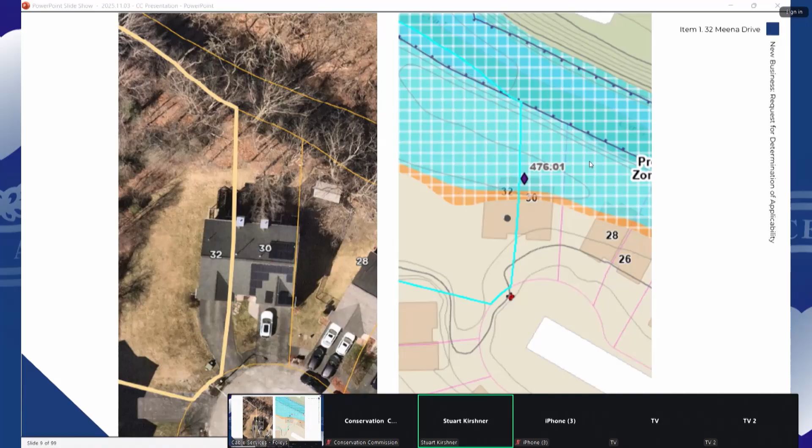Motion for a negative determination. Second. Commissioner Canton? Aye. Commissioner Kirshner? Aye. Commissioner Nystrom? Aye. Commissioner Frattoni? Aye. You're all set. All right, thank you. Have a wonderful evening. You too.

Next item, old business, 342 Lake Avenue, notice of intent.

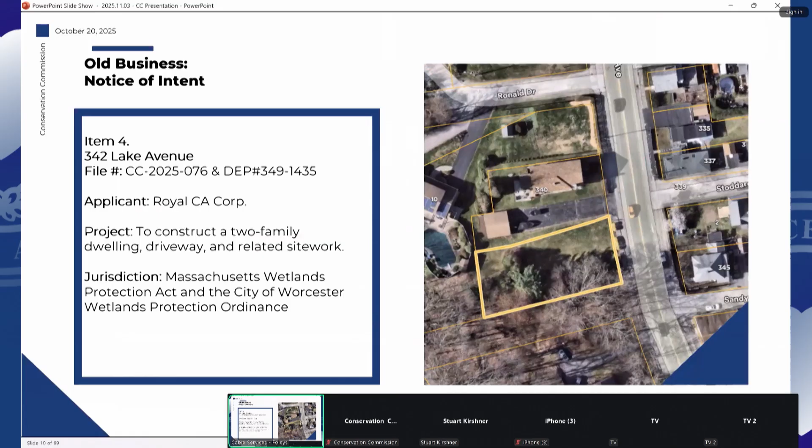If you recall, I was here last time for the construction of a two-family dwelling in the buffer zone to BVW and bank associated with an intermittent stream. At the last hearing, we presented our plan, knowing we had a few minor modifications that have since been provided to the Commission. Namely, we showed the walkways as they will extend from the driveway. We added the trees along Lake Avenue, and I believe that was it. But the revised plan is up there on the screen, and I believe the Commission has copies, and happy to answer any questions the Commission may have.

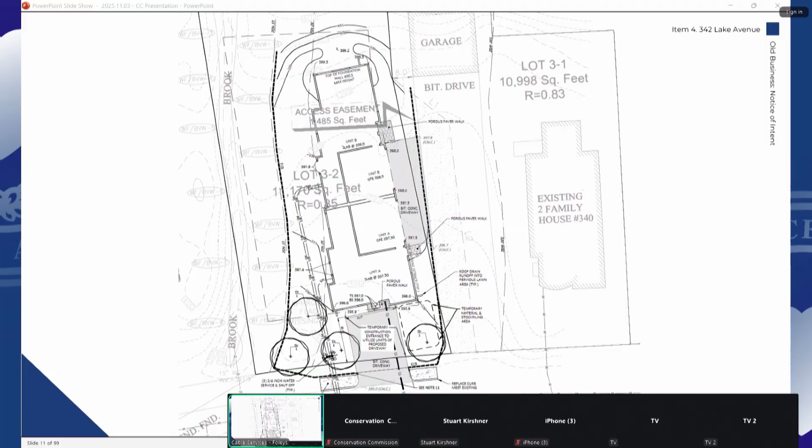Thank you. Any additional comments or questions from staff? Nothing further from staff. The revised plans address all our comments. Commissioners?

Anyone here from the public on the project? Anyone online? No? Okay. Is there a motion?

Motion to close the public hearing? Second. Okay. Commissioner Canton? Abstained. Commissioner Kirshner? Aye. Commissioner Nystrom? Aye. Commissioner Frattoni? Aye. Thank you. Commissioner Canton can't vote on this one, sorry.

Fair enough. Thanks very much, everyone. Have a good night. No, you want the order of conditions? We need to vote on that. Oh, too, sure. Please do. Thank you.

So in addition to the standard conditions, we have condition 24 for wetland flagging. I guess a question to the Commission: typically the Commission wants to see permanent markers installed associated with buffer zone construction like this. Is that something they'd want to see here?

I guess how close is it, just trying to see exactly how much space there really is between any of that land that's not vegetated. You can see on the screen here, we have some pictures. Top left is looking from Lake Ave towards the property. This bottom one is looking up the stream channel that's just in the woods here, and this is looking towards the street. The 15-foot buffer probably extends into that existing lawn space. Typically we do the 15, or alternatively could do along the existing vegetation line if we don't want to take away additional lawn area, but it's up to the Commission.

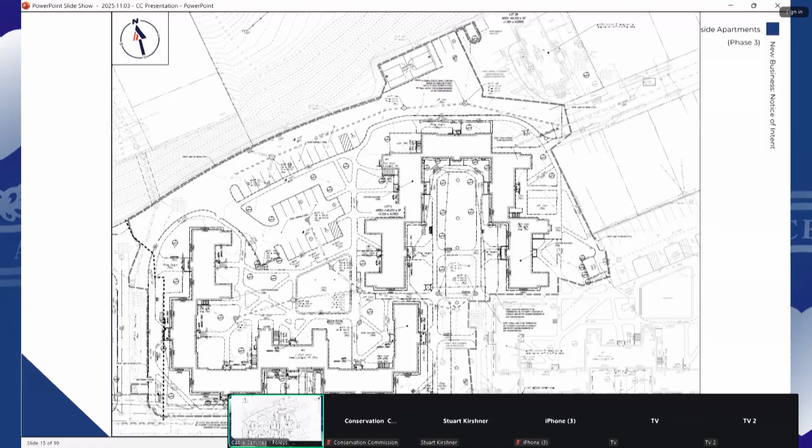Good afternoon, or good evening. Matthew Ashley with Bohler, here on behalf of Tremont Development Partners and E3 Development LLC. So we're here for you tonight for Phase 3 of the 4-phased redevelopment of the Lakeside Avenue Affordable, or Worcester Housing Authority complex over there.

So you're probably familiar with the first 2 phases. We've been in front of you a couple times now, so this is just the 3rd phase, which is not as far down Lakeside Avenue. This particular phase is to raze and rebuild 2 of the buildings out there and replace them with a single building complex with 104 units.

Jurisdictionally, our proximity to a catch basin right on Lakeside Avenue is for our local filing, and then Coe's Pond is right across Lakeside Avenue, and the 100-foot buffer just comes onto the sidewalk area that we're replacing as part of the development, along with some utility connections within Lakeside Avenue. But other than that, the rest of the site is outside of that 100-foot state jurisdictional buffer.

So on site today, there really isn't much in terms of stormwater treatment. Just some catch basins out there that get piped into the larger stormwater system within the city of Worcester.

Under the new conditions will be fully state and local compliant deep sump hooded catch basins, water quality units, and an infiltration system for the first 1 inch of rainfall across the development. Other than that, we're reducing impervious surfaces out there, and really a big improvement to the area in terms of stormwater treatment and quality. Eric and his team provided some initial comments to us prior to the last hearing, and we responded to all those comments, didn't really have any objections.

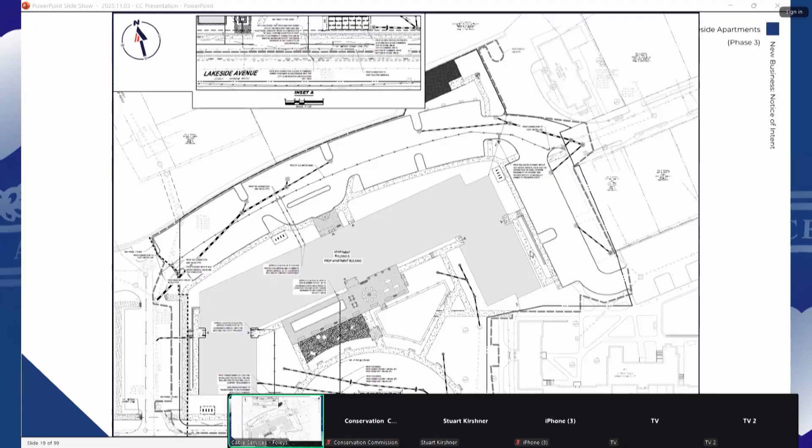Okay, thank you. Staff, any additional comments? I don't have too much to add on this one. As Matt mentioned, we sent over comments from our team. DPW also issued a comment letter. We received responses from the applicant going through and addressing each of those. We got a revised plan set. Definitely happy to see the inclusion of the infiltration unit on the most recent set of plans. So at this point, I think we're all set.

Thank you. Commissioners, questions or comments about the project? Anyone here from the public on this project? Online? It's gonna be a quick night. Is there a motion?

Motion to close? Second. Commissioner Canton? Aye. Commissioner Kirshner? Aye. Commissioner Nystrom? Aye. Commissioner Frattoni? Aye. Proposed order of conditions?

All right, so in addition to the standard conditions, we have 24 for wetland flagging, 31 for SWPPP, 33 for stormwater management system maintenance, 38 for infiltration unit inspection, 39 for certification of stormwater infrastructure, 48 for dust control, 49 for dewatering, 50 cement truck washing, 51 equipment placement, 55 for construction monitoring reports, so just the SWPPP reporting, 56 for spill prevention, as-built plan for a COC request, 66 for sand and salt, 68 for wetland permitting with ongoing conditions, 37, 66, and 68.

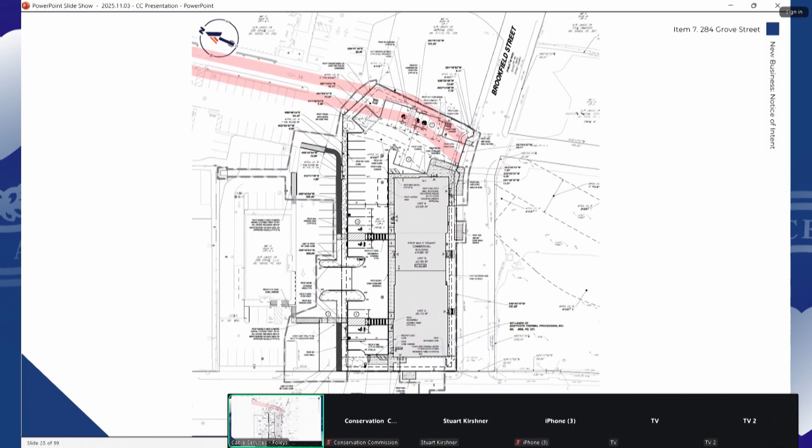This plan, so the reason we're here is we're proposing a stormwater connection from our proposed stormwater system to one of the Millbrook box culverts that runs underneath the site. I've highlighted those in red on this plan and the plans that we'll see on following slides as well.

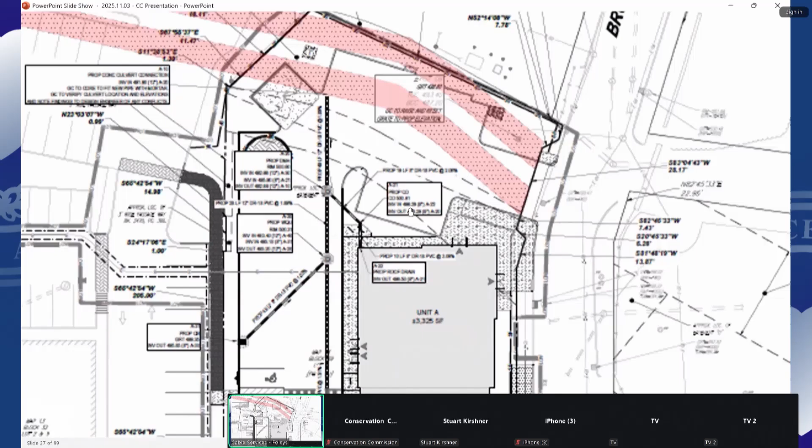So this is our grading plan. It actually might be helpful, Eric, if you just go to the next one. So this is our stormwater plan. As I mentioned, we are proposing a new connection, a core into that existing culvert. It's going to be a 12-inch DR18 PVC pipe. Prior to discharge of the stormwater into that culvert, we are providing a series of catch basins that will provide treatment via the deep sumps within the catch basins, and then just prior to discharge, it's actually going through a proprietary water quality unit to provide additional water quality control, and then it will discharge into that culvert. The roof runoff, as you can see there, is also discharging into that culvert.

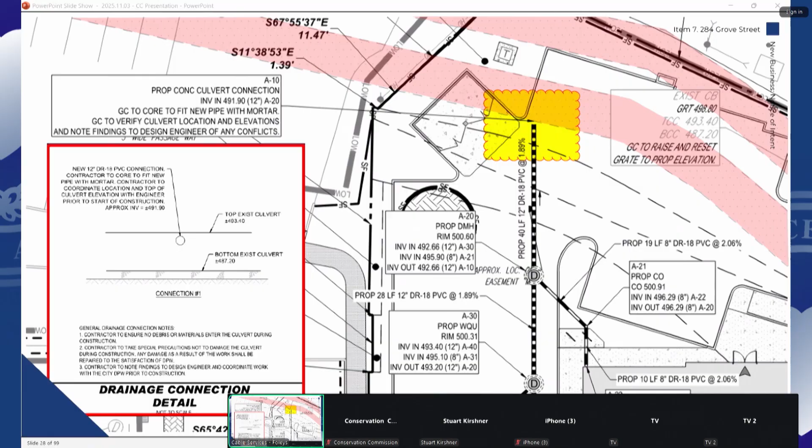We're really familiar with this culvert, given that we did the bank development next door as well as that medical office building. So we're familiar with the structural integrity and how to work around it. We've also made similar tie-ins to the culvert elsewhere in the city, and on the last slide you saw that construction detail, which we've kind of crafted for similar projects in the city in the past.

As I mentioned, with the deep sump-hooded catch basins and the proprietary unit, we're providing 95% TSS removal prior to discharge into that culvert. As far as protection of the culvert, our site contractor submitted a culvert protection plan that lists practices they'll implement during construction to protect those culverts.

I'll just list those off right now. It's going to be locating the culverts with stakes, so they'll have the culverts delineated on site so that it's clear where they are located. They'll do daily surveys and inspections of those stakes to make sure they're still there. If they're not, they'll be replaced.

No stockpiling of materials on top of or within 10 feet of those culverts. No parking construction equipment on top of or within 10 feet of the culverts. Any excavation within 10 feet of the culverts will be done with the aid of a groundman specifically tasked with directing the equipment to minimize ground disturbance near the culverts. And when equipment is required to operate on top of the culverts, they'll use low ground pressure equipment models, which reduce the load placed on those culverts.

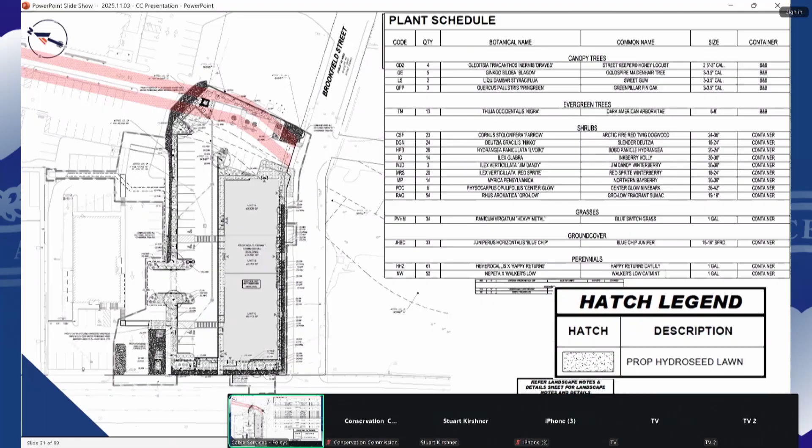And that's really all I have. I know we have received comments from conservation staff as well as DPW. I think we've addressed most, if not all of them, but happy to answer any questions the commission may have. Thank you.

Staff comments? Yeah, so as Nick mentioned, we did submit comment letters both from the Planning Division and from DPW, and got responses to those. I think our main concern with the initial filing was just getting more details about the protection of the culvert during construction, so it was good to get the protection plan that was provided.

So the one lingering concern that I have, and I mentioned this earlier, is that the construction entrance is currently proposed on top of the culvert, and it seems to conflict a little bit with some of the measures described in the protection plan. The other concern with the location of the construction entrance is that there's a catch basin right in front of it, and I know it's going to be protected with a silt sack, but I think there's definitely cause for concern with sedimentation that might get tracked out into the street from vehicles leaving.

So I don't know if there's a possible way to relocate that to the Grove Street side. I know the building makes access difficult given its location, but that's something we would probably want to see considered. And if it's not feasible to move that, I think we'd want a little more detail about how that location is not going to negatively impact the integrity of the culvert itself.

But yeah, most of our comments, aside from the culvert protection, were minor plan changes that have since been addressed. Don't really have too much more on that at this point. So I'll turn it over to the commission for any further discussion.

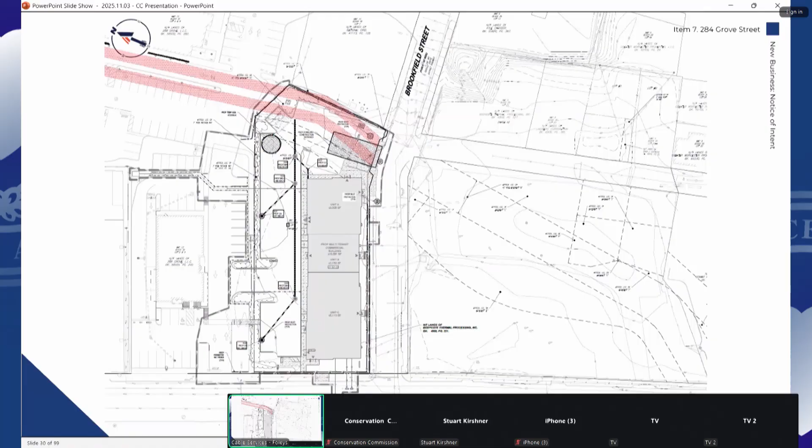So I have a similar concern about the construction entrance being over the culvert. My other concern is that when this property was in its demolition phase, there was very little regard to the care and cleaning of those storm drains, and it was one of the reasons I even joined conservation. Frankly, I walked by the site and was alarmed knowing that the brook ran right underfoot and nothing was being done. It was the construction entrance for the demolition phase as well. So it's hard to imagine the equipment going in and out over that drain and on top of that culvert without it causing problems again.

So if there's any way to move it, that would not just be a preference, I would say that'd be a requirement. Because if it's a construction company related to the ones that did the demolition, I think somebody ought to be there every day to make sure that this is actually happening.

Yeah, I don't know, I wasn't involved in the demolition process. My guess is Ricciardi Brothers, they're the ones that prepared the culvert protection plan, that are the site contractors for this job. My guess is that it was a specific demolition contractor that did that work, but I'll relay that message to our client and make sure that's clear.

From my perspective, the site hasn't been particularly well protected or managed even since then. The fence falls down, the erosion barriers vanished. So yeah, I'm not feeling really comfortable that no matter what plan you put in front of us, somebody's going to execute on it. And since I live in the neighborhood, I will be watching.

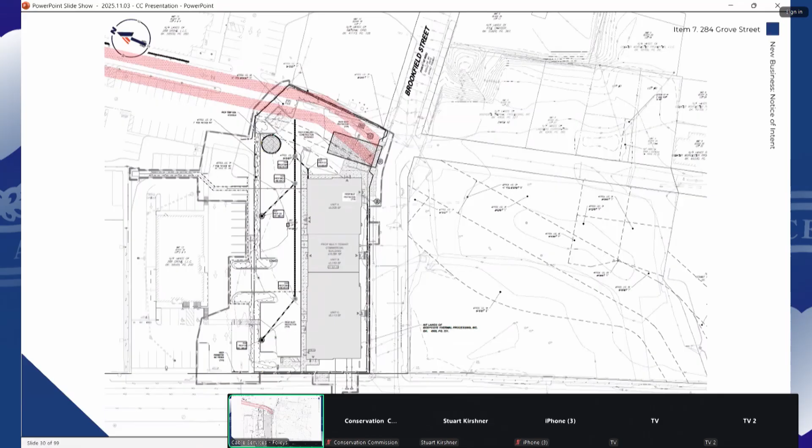Good evening. My name is Tim Hool, civil engineer and engineer of record for BL Companies. For the record, our office address is 100 Constitution Plaza in Hartford. I'm here tonight on behalf of National Grid, Massachusetts Electric Company, as the applicant and current occupant of the site. As mentioned, the address is 449 Southwest Cutoff.

I will say, with that, we are in for permits with both municipalities, as you know, as we are here tonight. We did appear before Millbury a few weeks ago. We were continued because at the time we didn't have the DEP file number. We have since received it, and I think the meeting for Millbury is on Wednesday night this week. They had no comments of consequence for the wetlands for this project, but I just wanted to share that in full disclosure.

So the total property is about 12.8 acres. As I mentioned, it's currently occupied by National Grid. It is an electric operations facility, so it's their electric division. They do use the existing building that's in the neighborhood of about 60,000 square feet, give or take, as an office facility, as well as there's a bit of warehouse and training space within.

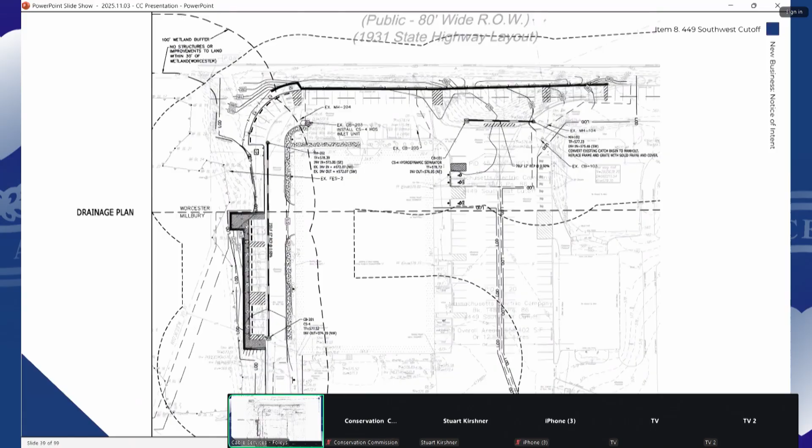And then a lot of the remainder of the site, especially as we look towards the east, which is off screen, they use it as a training grounds for the various crews. So it could be training for their lines crew, their pole crew, or various other teams. So this is a pretty high important site for them.

The site is bordered by Gen Manufacturing to the south, Discover Services to the west, a wooded area as well as Hourglass to the east, and Route 20, or Southwest Cutoff, to the north.

The west side of the site is where the main jurisdictional areas come into play from a wetland standpoint. There is a sizable wetland that totals a little under an acre. It's immediately west of the property.

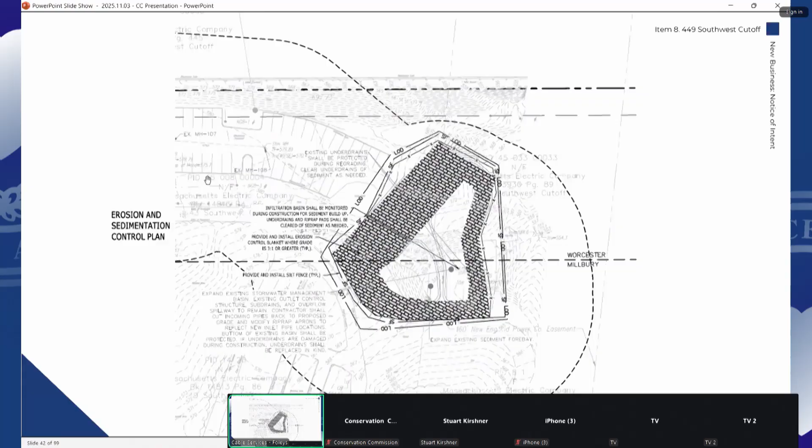It's that area just to the very edge of our screen here. There's only a small portion of that, about 12,000 square feet, that falls physically on this property. The remainder, roughly 40,000 square feet or so, falls on the abutting property to the west. However, it is certainly a wetland.

There is also a little bit of wetland resource area immediately south of the driveway, which comes in off of Lottie Farm Road in Millbury, down in the west corner. That wetland on property is noticeably smaller, about 2,500 square feet or so, again within this property.

From a larger picture standpoint, we also have the stormwater management system on site. It is largely self-contained. Currently, the stormwater goes in one of two directions. The westernmost portion of the site is captured in catch basins and flows directly out to that western abutting wetland, the larger one, with no major formal treatment. There are catch basins there, but there's no sediment forebays, no hydrodynamic separators or similar treatment.

From the majority of the site, especially east of the building, the main training areas, parking lot, and so on, that's all captured similarly in catch basins with very limited treatment. Then it's piped underground into an existing stormwater management basin on the very eastern limits of the property. That basin does have a little bit of treatment—there is a sediment forebay in there, and it does have an under drain. So there is a treatment happening within that basin.

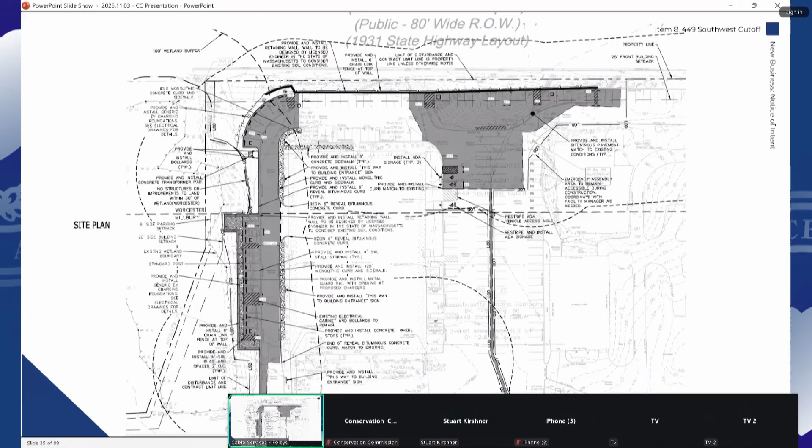The north central portion is where we're reworking a little bit of this drainage flow. Currently, a lot of that middle dark gray area drains to the west, which is the plan left side. As we're regrading that and adding the parking, we're adding in a catch basin in that area to capture most of it right there and pipe it. Instead of sheet flowing to the west, we're capturing it and piping it now to the east to go into the existing stormwater management basin on site, and we are doing a significant enhancement of that basin.

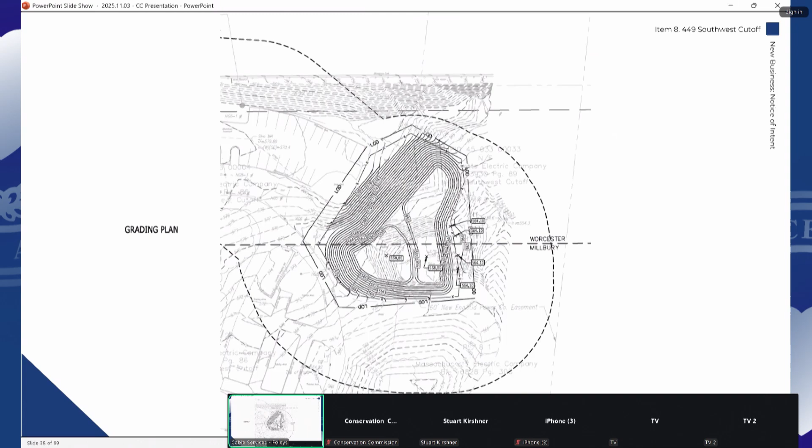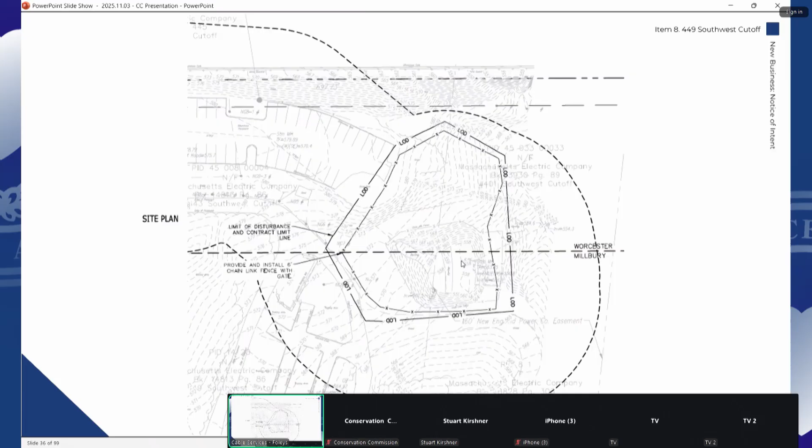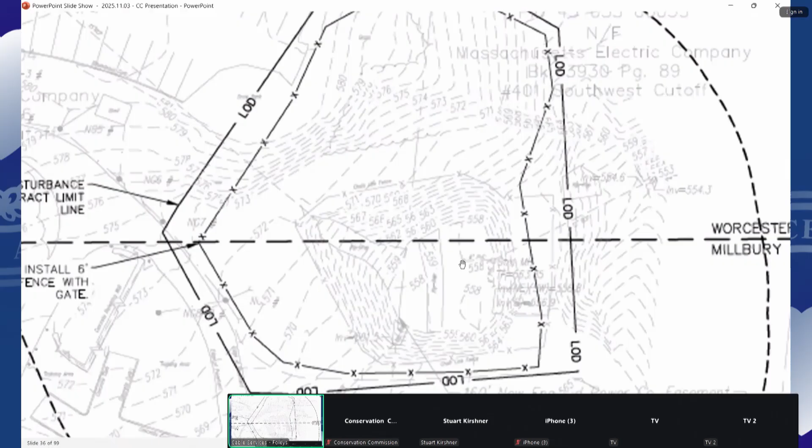It's going to more or less double in size. The basin that's there today is a similar tight area kind of in the bottom right corner of that basin—you can see it a bit here. There is a sediment forebay on the left side, where the initial treatment comes in, and the right half is the main body of the basin. There is an existing outlet control structure leaving that, as well as an overflow berm. In proposed conditions, it is, like I mentioned, almost doubling in size.

So again, a similar layout. The left side is the sediment forebay. We are cutting back and rebuilding the pipe end coming in from the main on-site drainage to the northwest. There's an overflow weir between the two smaller pools within the basin, and then the right-hand side is the enlarged main body of the basin for infiltration.

We are proposing to retain the existing outlet control structure and overflow weir. In total, the stormwater management system will see a net reduction in peak discharge rates to all of the design points we considered, as well as an enhancement in treatment capacity directed to the wetlands on the west-hand side of the site. This eastern side will largely function as is today.

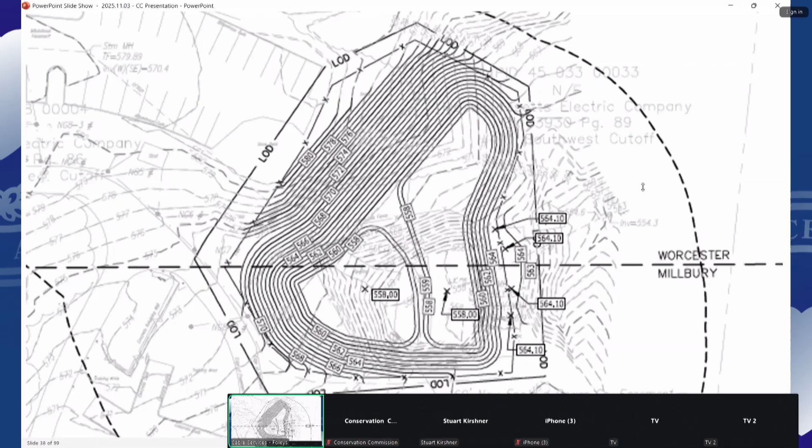I guess with that, I would just like to close and note, this is the revised plan. I just wanted to note for the record, the original submission was a smaller basin on this side. We did have a little bit of a miscue in the calculations. Those have since been revised and resubmitted. I believe that was really the only comment of consequence from staff.

We are working through a few comments with the planning staff and planning board for their process. Nothing really major of note, but the one I would like to share is they requested a couple of landscaped islands be added within the central parking area, because there are no islands in there today, just hatched areas at the ends of stalls. So as we work through those, it's likely we will increase the amount of landscape cover compared to what was submitted today, but it should have no major impact on the stormwater management or the grading. We verified that all the drainage pathways will remain the same.

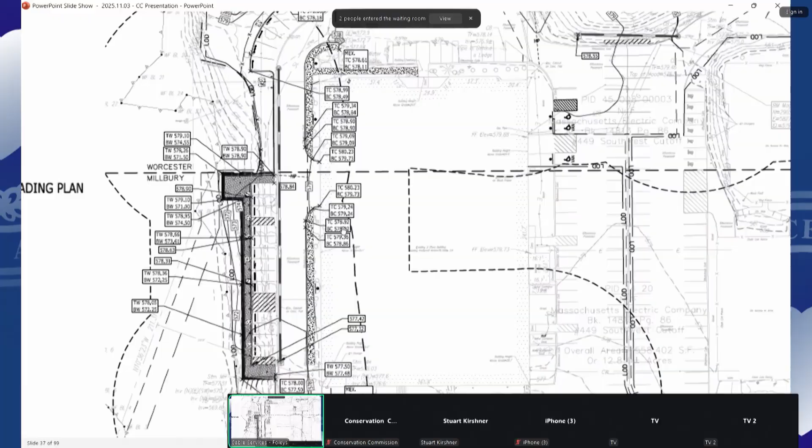Yes. So there are two catch basins up there today. There's one near the corner of the rounded parking, actually on the inside corner of that rounded area. We are proposing to replace that with a hydrodynamic separator inlet unit, so that will be an improvement for treatment. And then the new structure down on the south, along the straight leg of parking down there, we're proposing as well a hydrodynamic separator inlet unit at the southern end. So both flows of water going into that flared end, or that existing outlet, will all receive treatment.

The other catch basin up there flows to... I've got to stop and think about this for a second. I believe that actually does flow—it's on the northeast corner of the building—that does flow to the west, but it will flow through the proposed upgraded hydrodynamic separator. So it will receive treatment, okay. Thanks for that clarification.

Any other commissioners, questions? Anyone here from the public on the project?

Is there a motion? Motion to close. Commissioner Canton? Aye. Commissioner Kirshner? Aye. Commissioner Nystrom? Aye. Commissioner Frattoni? Aye. Order of conditions?

So in addition to the standard conditions, we have 24 for wetland flagging, 25 for revised plans reflecting any changes required by the planning board, 37 for stormwater management system maintenance, 39 for certification of stormwater infrastructure, 48 for dust control, 49 for dewatering, 50 for cement truck washing, 51 for equipment placement, 56 for spill prevention, 66 for sand and salt.

Ongoing conditions 37 and 66. Any questions? No. Is there a motion?

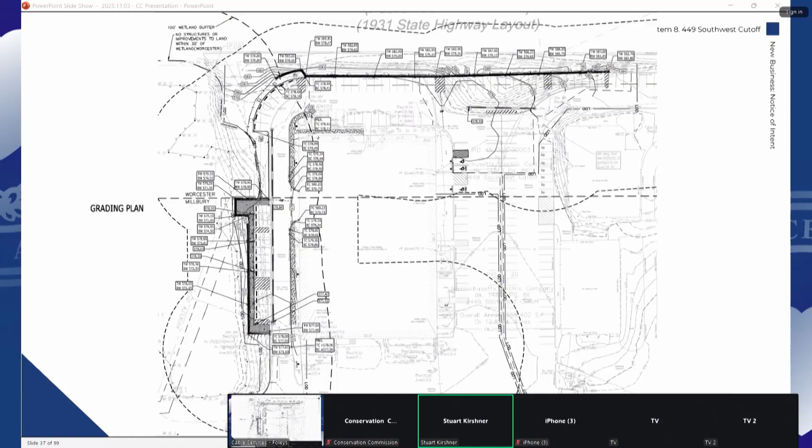Motion to issue the orders of conditions as described. Second. Commissioner Canton? Aye. Commissioner Kirshner? Aye. Commissioner Nystrom? Aye. Commissioner Frattoni? Aye. That's it. Thank you.

Okay, next item, number 9, notice of intent, 23 Barry Road.

And I know that's not you. Matt, you should be able to unmute yourself now. Okay, there you go. Thank you.

Matt Marro, representing the owner of 23 Barry Road. Oh, thank you. I was just wondering if anyone was going to share the screen.

There was actually an existing pool on site that was buried. The foundation was unburied, and the pool is actually going to go on the exact same footprint as the prior pool, with a patio going around it.

There is erosion protection that is up now, in the form of wattles and silt fence. I had S&M Farms go up and place it around the perimeter of the work that was done. Work has ceased at this point.

The pool in question is an in-ground pool. It is going to use a cartridge filter, so there will be no backwashing required that could get into the wetland resource area. There will be no work within 25 feet of the wetland.

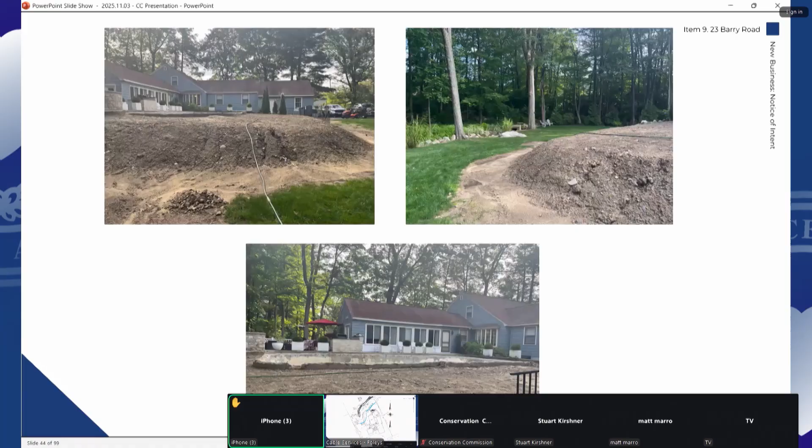So the existing patio is mostly on the side of the house. We're just going to add a coping around the pool, and maybe about 3 feet from the coping on the other side, near the little stream. So we're not doing anything extensive to get close to it. About 75% of the patio will be on the house side, which is actually existing, since there was an existing pool there before, as Matt mentioned. We're basically just fixing that side and leaving it as is, then coping around the pool, maybe about 3 feet just around it.

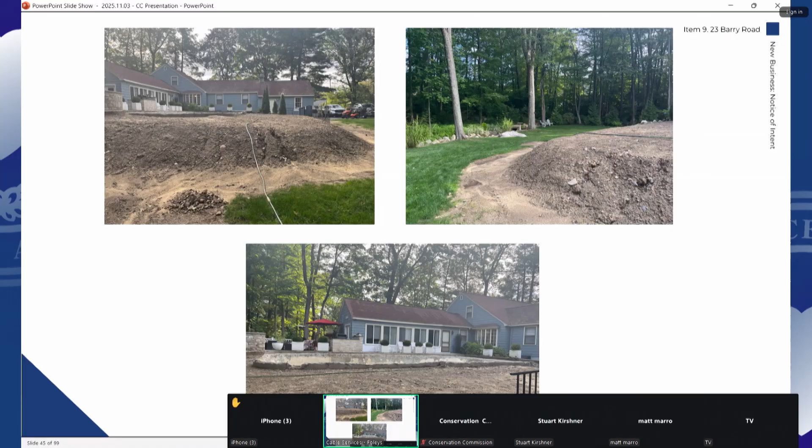So there's a lot of work that was done around the brook that looks pretty unnatural. Was that pre-existing? How long has it been there?

I've gone back on ortho photos, and it looks like it's been there for quite a while. My client, I forget exactly when he bought the property. I'm looking through aerials right now, if you want to just give me a moment.

So I guess my question is the statement that there's no BVW on the near side of the brook. I'm not sure how there could be because it's in crushed stone.

Now I'm zeroing in on the 2019 photos. Let me make sure I got this correct here. So I'm zeroing in on the 2019 photos, and I actually do see a stone structure in the 2019 photos on both sides, but there's an apron of small stone added after.

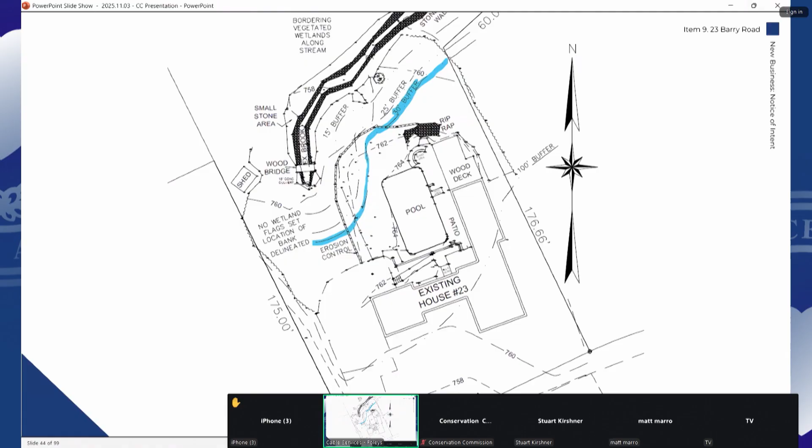I'll make a motion to continue to the next meeting. Next meeting's on November 24th. Second. Commissioner Canton? Aye. Commissioner Kirshner? Aye. Commissioner Nystrom? Aye. Commissioner Frattoni? Aye. So we will see you in a couple weeks.

Okay, thank you very much, ladies and gentlemen. I really appreciate your time. Thank you.

That is it for new business. On to certificates of compliance.

So first up, or the only one we have tonight, is for the M165 transmission line. This is an order of conditions issued back in 2024 for utility maintenance of the structures along this line, the one that cuts through Granite Street, goes through the Broadmeadow Brook Wildlife Sanctuary area, and gets down into Millbury.

We did receive written certification that everything was done according to the approved plans and in accordance with the order of conditions. I didn't have a chance to personally do a site walk to inspect the site, but we did receive photos as part of the COC request. And I know we have the applicant's representative on the line if the commission has any questions.

Based on the photos, are you satisfied with what they're stating that they've done? Yes.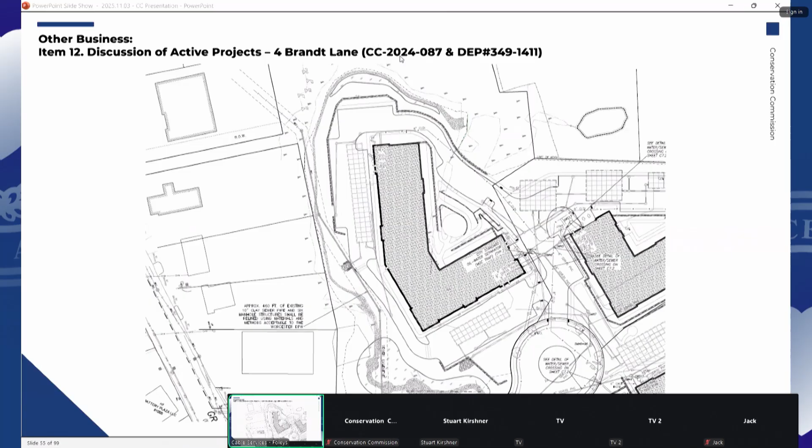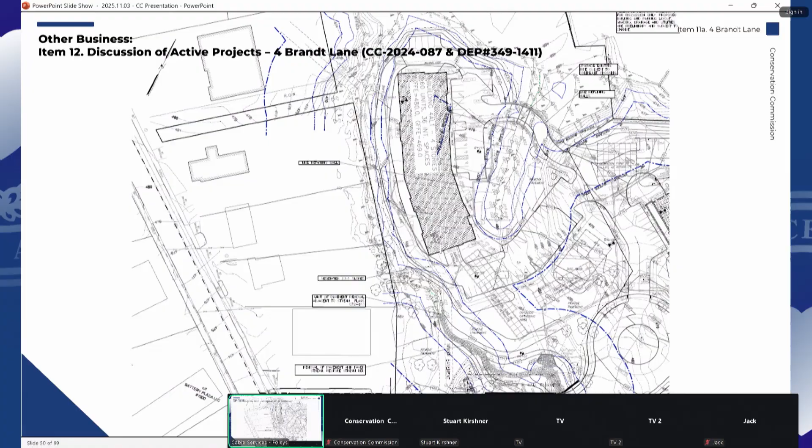By eliminating the need to reroute the stream, we're going to instead mitigate the existing ditch by removing the human fill in the area and the contaminants, remove those, remediate, add suitable soils and suitable soil substrate so that we restore the stream channel.

This would require us to do a stream crossing. There's already an existing culvert, undersized, that doesn't meet stream crossing standards in one area. What we're going to propose there is to take that culvert out and put in a three-sided box culvert that'll meet stream crossing standards. So we're going to keep the same stream path going underneath that now three-sided box culvert through the restored linear stream, and then into the 140-foot long pipe.

So we are trying to pull in the limit of work as much as possible as well. Patrick Healy from Thompson Liston showed the previous approved limit of work and where the new limit of work would be for the new grading. That green hatched area is the area we'd be working in that is needed for grading that we'd restore back to a natural environment, natural buffer zone.

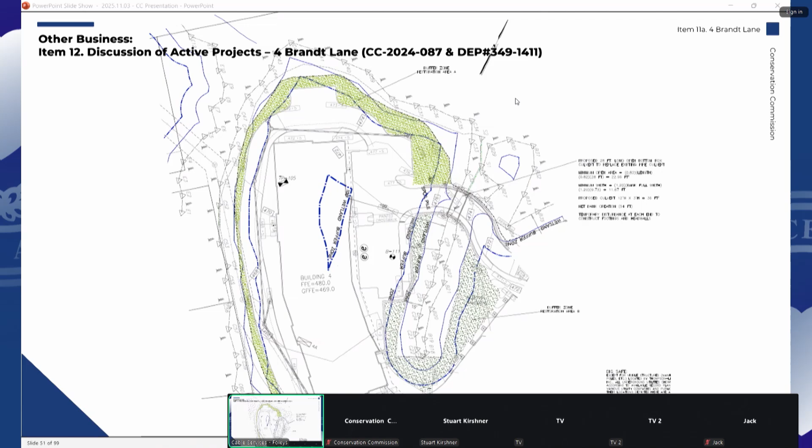And then additionally, the buffer zone adjacent to the stream, that linear stream, would be restored as natural buffer zone as well. Then plan south of this, the paved stream channel is still being proposed to be restored. It's paved right now.

We want to restore it to a natural stream channel. Since we're going to have reduced flows coming into this area, since we're not rerouting the stream, we've removed the wetland creation areas. So it's just going to be the stream channel, and we're going to grade it out so it's a buffer zone. If it ends up being able to function as wetland, then great, but we don't want to propose it to be a wetland creation area, knowing that we're going to have less flow coming into the area. So we're also trying to propose as much mature tree canopy to remain, trying to just pull away as much pavement as possible and fill so that we can retain some of the mature tree species in this area.

So you'll see in the center of this graphic a riprap pad. That's where that linear stream, after it flows through that long culvert, is going to discharge onto that riprap pad and then re-enter into the natural stream that we're going to recreate there. And then the crossing under Brandt Lane is still proposed to be a compliant stream crossing.

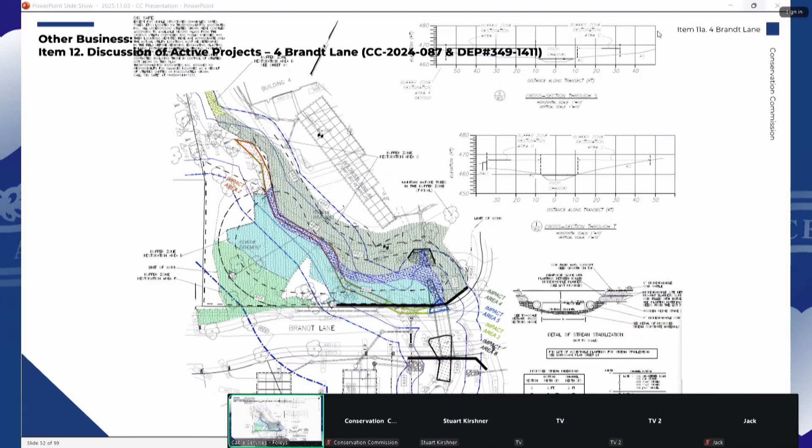Additional slides we also included showed, on the Pine Hill Road side of the project, we are going to try and propose as many mature trees as possible in that wetland on the right side of the screen. When we were out on the site walk with DEP, they were curious if we could tighten up any limits of work there to retain any mature trees, as that seemed to be one of the only areas on the site with relatively natural topography and mature tree canopy.

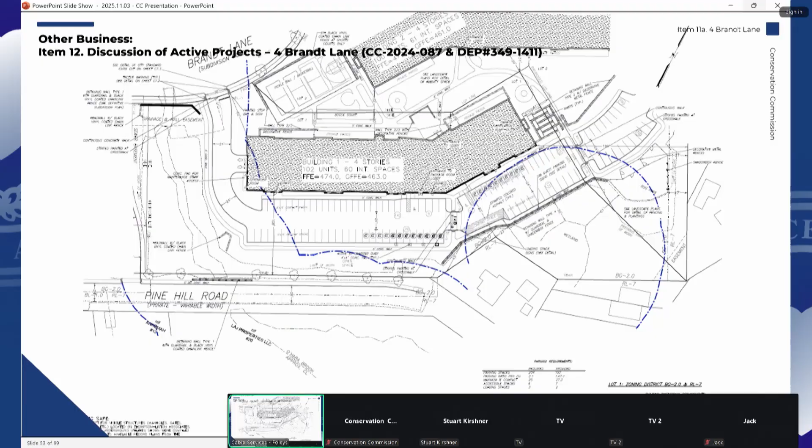So that's our proposed alternative concept plan. Let me know if you guys have any questions.

Staff first? Yeah, so about a week or two ago, I had a chance to meet with Mitch and Patrick Healy and DEP to discuss this. As we mentioned a while back, DEP issued an intervention, basically stating their opinion that the order of conditions didn't necessarily comply with 310 CMR 10. They seem pretty adamant about the stream relocation being a significant issue, and that's kind of why we're here with the adjusted plan.

Kind of seeing it for the first time when we met with DEP and the applicant's team, my initial reaction was that it's definitely a shame to lose the significant area of BBW that would have been created by the first plan. So I suggested the applicant take any measures they could to restore the buffer zone or restore the stream channel in this area if this is going to be kept. So it's nice to see all the additional buffer zone restoration areas shown on this plan.

Procedurally, like Mitch said, basically if the applicant submits a request for an amended order of conditions with a plan that satisfies them, they would then revert jurisdiction, and the process would go back through Concom. Obviously, there's also other approvals associated with this through the city that might or probably will need to be modified through Planning Board or ZBA. So I also suggested an interdepartmental staff review of this as well, so that's something else we can do.

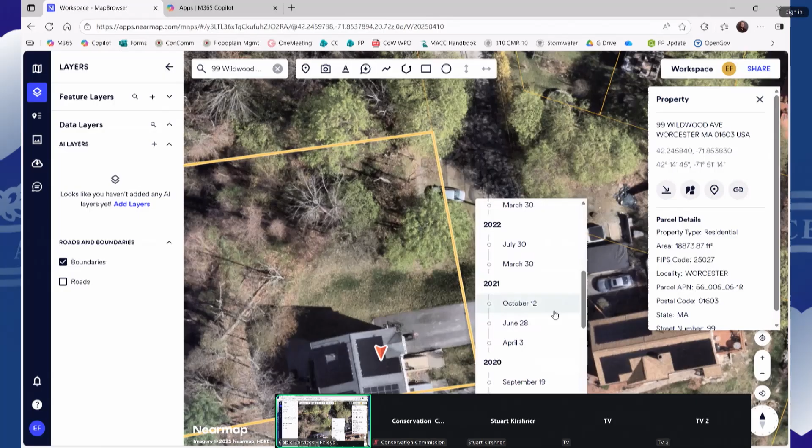So this is April of this year up on the screen now. This is the area in question that's kind of filled in and parked in. You could go back to 2018 in April, and you can see that it's just trees at that point in time. Hard to say if that's shadow or wet ground, but it looks fairly wet.

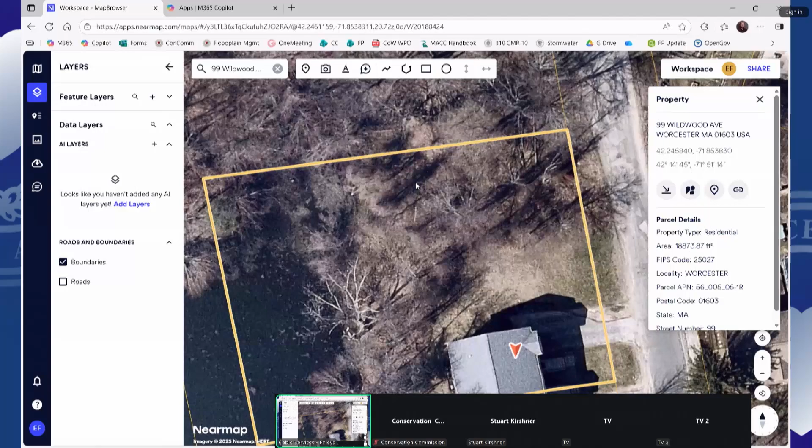I think, also regardless of the communication, it was made pretty clear back in the spring that this was something that was due by July 1st.

So is that something we need to vote on to start? Yeah, so if the commission wanted to issue a fine, it should take a vote to issue a fine. For example, you could say, make a motion to issue a $100 fine pursuant to the non-criminal disposition procedures for violations of performance standard 4.2.4. That would be the alteration within the 15-foot buffer.

Is there a motion? So moved? Second? Commissioner Kenton? Aye. Commissioner Kirshner? Aye. Commissioner Nystrom? Aye. Commissioner Fatoni? Aye. All right, so I will issue that to the property owner with a follow-up by email and letter.

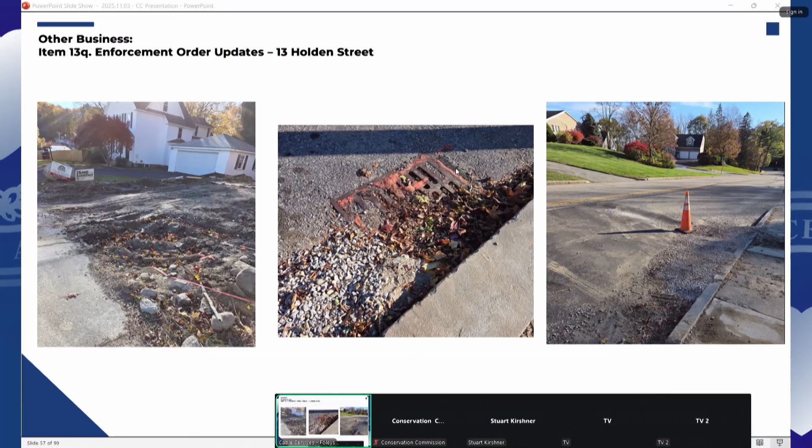All right, so what's the wording on this amended enforcement? So we would, I guess, be looking for a motion to amend the enforcement order to add required actions: reestablishing all perimeter erosion controls, cleaning out debris from the street, cleaning or removing the silt sack, having a vacuum truck vacuum out any accumulated debris in the catch basin, reinstalling the silt sack, and that all other work on site cease until those actions are completed. I think we'd be looking to see a receipt from the company that vacuums out the catch basin as proof that they've done that.

Okay, so moved. Second. Commissioner Canton? Aye. Commissioner Kirshner? Commissioner Kirshner?

Not hearing you, Stuart. He disappeared? He's still... there we go. We got you back. Commissioner Kirshner? Aye. Commissioner Nystrom? Aye. Commissioner Fertoni? Aye. Any other enforcement? Nothing from staff.

Open space. We received notice that we were awarded a land grant for the Brooks Dairy Farm project that we've brought in front of the commission a couple times. That's being partially funded with CPA dollars and now partially funded with land grant dollars as well. So that's exciting news. The Healey administration just put out a press release on that this past week.

Next steps on that will be: we'll need to submit a conservation restriction to EEA for their review, that will ultimately be granted to Greater Worcester Land Trust. We'll need to go through the contracting process with the state and the city through the CPA fund, and hopefully we'll close on the property in February or March, definitely before June, which is kind of the drop dead date for getting that done.